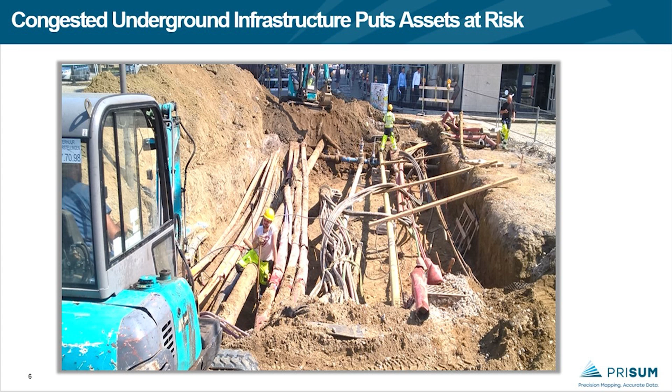It's very important, safety is very important. But other than that, there's going to be service interruption and a lot of project delays, cost overruns. So it's very important for everyone to be proactive to know where the utilities are, so that people building new infrastructure can complete projects on time without surprises.

Most utilities, before they even get into the ground, go through a design phase where as-planned maps are generated by the engineering group of people. But once the contractor hits the ground, either boring or open trenching, he'll run into multiple roadblocks - like probably there's a rock, so he has to steer his HDD away from the rock and keep moving. All these critical modifications or changes made by the contractor need to be captured onto an as-built map.

There's definitely a huge need to have an as-built map generated after the pipe is put into the ground, and these as-built maps are very reliable. If someone is building a new project in the future and referring back to the as-planned map, which was design-based, there's a possibility they may run into problems. So all the GIS systems that utility owners own should be populated with accurate and reliable as-built maps, which will be helpful for future projects.

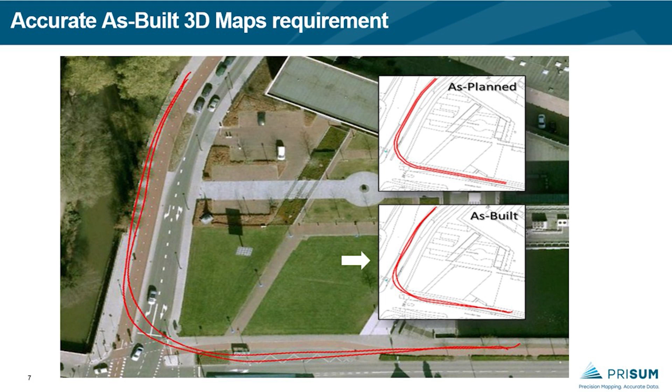You might be surprised, there are traditional systems already existing - a person can walk over, have a sonde in the pipe, tone the pipes, or have a tracer wire to locate those utilities, and that's absolutely right, we can use technologies like above ground tracing to locate underground utilities. But there is a gap. What about if you couldn't locate it with above ground services, like EMI, electromagnetic induction? What if the pipe is going under a river? We cannot do any above ground locating. That's where we add value with this technology.

If the utilities are unlocatable, like for example HDPE or PVC with no tracer wire, we may not be able to locate them. And if it's an abandoned line, no one has a good as-built map showing where those abandoned lines are.

As I said, there's no traceability for the pipes. There are no ball markers or traceable wire, and the utilities are unlocatable, non-metallic pipes.

Those are the scenarios. If it's an HDD bore, HDD bores may vary anywhere from 3 feet down to 30 feet down, or maybe 100 feet down if it's going under water. So all these utilities highlighted on the screen need to be accurately located with other technologies. The traditional methods may not be able to provide reliable data.

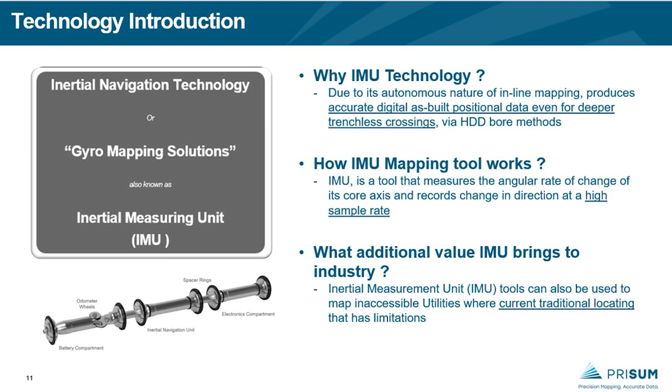What's the value that we are bringing to the industry? Some utilities are inaccessible, where you cannot access from above ground, where there are deeper utilities. The traditional technology will have limitations to locate those utilities. That's where we add value.

I want to explain what exactly happens with this operation. You can see the picture there. The tool is built with odometers, which collect the distance, riding on the ID of the pipe and collecting the distance. And the tool is built with gyroscopes, accelerometers, and inclinometers, which collect the rolling, heading, and pitching information.

So this is the raw data that's collected by the tool when it is run from point A to point B, collecting 100 samples every second. That's where the high definition data comes in for our team, Prisum Technologies, to take the data, process it, and generate a GPS coordinate every 1 foot.

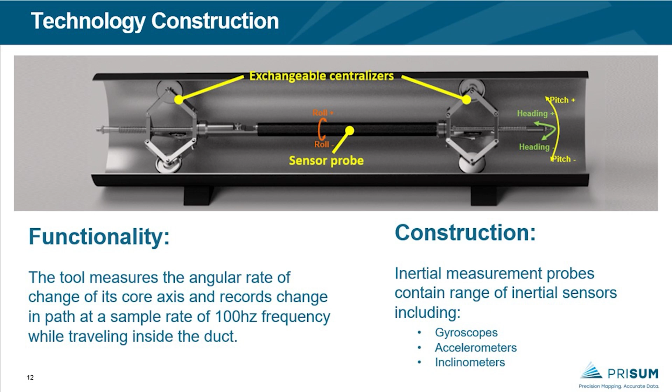It may not be needed for utilities like sewer pipelines or water utilities, but when it comes to the gas industry, they want very high definition data so that they can protect their utilities.

If the two access points are 5,000 feet apart, you don't really need any above ground access. You launch the tool at one point and collect it from the other side, and that's all. You don't need any above ground access, and we can generate accurate XYZ information.

Along with this XYZ information, each utility also sees this data from another perspective. XYZ is always important for the asset management team to establish the GIS information. Whereas if it's a gravity sewer, they need to know the azimuth and pitch information so they can make an assessment or QA/QC verification to ensure the HDD contractor maintained the proper change in grade elevation for gravity flow. Also, when you're trying to put in a telecom line, you need to know the bend radius of the pipe, because there's a possibility they're going to put a huge amount of glass into these pipes.

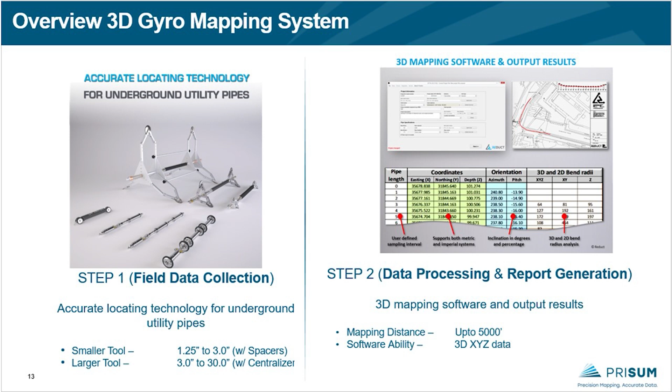And if that pipe has very tight bends, you're going to just break the glass. So the telecom industry and the power industry want to know the 3D and 2D bend radius of these utilities. There are multiple ways people look at this data. It's not only an as-built map, not only XYZ, but there are other benefits that could be utilized for making the right decisions in the field.

So once you run the tool, you connect it to your laptop, give the entrance and exit GPS coordinates in northing, easting, elevation. Once you process the data, you should be able to see the aerial, plan, and profile view, the XY, and also the depth information. And you should also get a 3D model to rotate and see from every angle, which will be the point of interest. So these are the results that will be outputted.

Along with this, we provide a CSV file, because depending on the software system you're using—maybe MicroStation—it's open platform data that comes out from this software, which could be uploaded seamlessly into any GIS system. There will be a CSV format, a KML or KMZ Google Earth file, to make sure the data is aligned to the geography. We also provide AutoCAD script files to generate the as-built maps. So these are all the output files that come out from the tool.

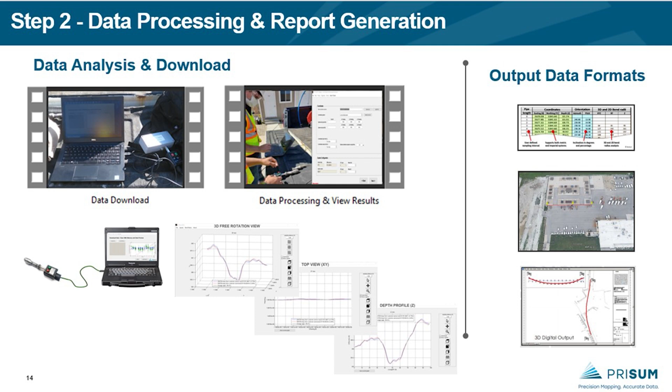And again, this is good—it provides you the data, but the big question is what accuracy this technology can provide. Once we ship the tool out, those are calibrated to a higher frequency. We put it on a robotic machine to make sure the sensors are set to a promised accuracy.

So there are two systems here: one is fiber optic gyros, and the other is a MEMS system. The fiber optic gyros, after calibration testing in the laboratory, are capable of generating an accuracy of 6 inches in XY over 5,000 feet, and also 4 inches in Z over that same 5,000 feet of length. So this is a very sensitive tool, and we need to provide accuracy at that level.

And there are other systems called MEMS systems, which are primarily used for shorter lengths and still produce 6 inches in XY and 4 inches in Z. So these are the calibrated accuracies from the laboratory.

Again, if you ask me whether the data we collected will be 6 inches of accuracy—maybe, maybe not. There's one additional parameter that factors into the equation: the condition of the pipe. If the pipe has water, or dirt, or any other additional parameters, that may affect the level of accuracy of this tool. But we promise that the tools that ship out from our facility are calibrated to the accuracies shown on the screen here.

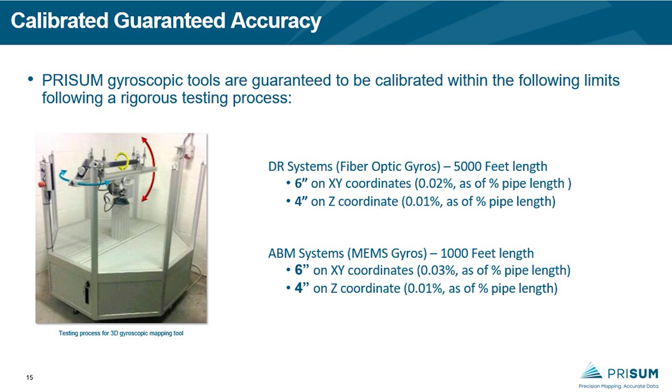Let me talk a little more about the benefits of this tool. Again, as I mentioned earlier, any utility going underground, whether it's sewer, drinking water, power lines, telecommunication, gas, or oil—anything underground—we have the ability to put this tool into the pipe and collect the data. The technology is completely independent of the material of the pipe, whether it's locatable metallic pipes or unlocatable HDPE, PVC, or even concrete pipes; we can still collect the data. So it's completely independent of pipe material.

As I mentioned earlier, there is no above-ground tracing needed, so there's no traffic disruption caused by using this technology. Basically, we need access of 6 by 6 feet on the manhole on one side, and 6 by 6 feet on the other side. The rest of it doesn't even need any access—that could be 1,000 feet apart or 5,000 feet apart. We don't need any above-ground access.

And the depth—as I mentioned, this is an autonomous tool. It's not communicating anything with satellites. All the data collected is stored within the memory on the tool, so there's no tether or communication with a satellite. So whether the utilities are 6 feet below or 100 feet below, the data produced by this technology is highly reliable. And the reason we say highly reliable is that if someone is walking above ground, he's going to collect a point every 50 feet, or 100 feet, or even 25 feet, and manually connect those points.

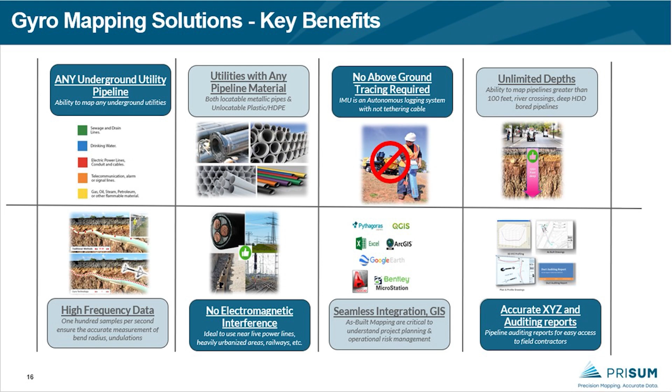One of the things I'll probably discuss in the next few slides is that there were some surprises that we ran into when we were mapping one of the utilities. So all those details, it's not going to be in the contractor's mind - it will be captured into this documentation. If someone is opening this document 5 years from now, he will have a full understanding of how this utility is constructed and what the condition of the pipe is.

So that concludes my technical presentation. I'll be spending more time walking through the results of the project, the bridge replacement project, and the utility investigation using the gyro mapping tool.

The first one is the 16-inch HDPE artesian water utility from the causeway, from one island to the other island. You can see the west side - this is where the tool is launched. And the other side is where the tool is retrieved.

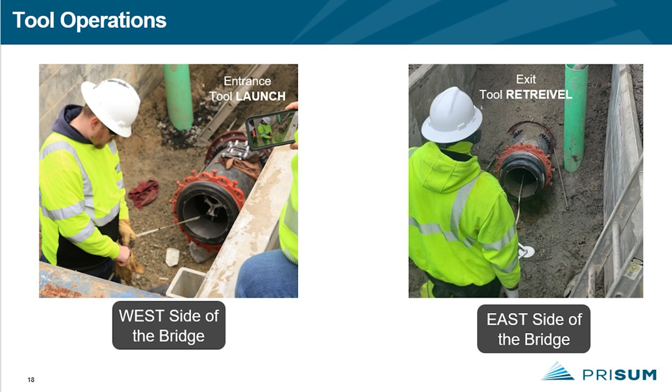And again there are some pictures. So the one thing on this project is it's a pressurized water main, and we cannot launch the tool into a pressurized water main.

Though the tool is designed to operate in both dry and wet conditions, in order for us to maintain the high level of accuracy, it's preferred to de-water the water main and then launch the tool. You can see the picture on the top left - digging down to the utility, daylighting the water utility - and then the other group of people came behind them and used their system to de-water the pipe.

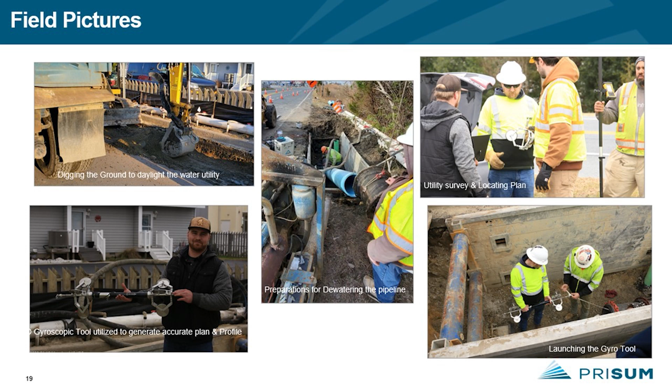Once it is dewatered, the utility survey team collects the GPS coordinates on either side. You can see the bottom leftmost picture, the gyroscopic mapping tool, which has been used to run from one end to the other end. You can see the picture on the right where they were launching the tool with the mule tape on either side of the pipe. So there was a lot of coordination that happened through this project.

And once we run the tool, this is what the results are. Again, this is all the data that's been collected - it's GIS data. It's northing, easting, and elevation, and also we can convert the data into lat-long information.

We never tie this data into a topography. Every time we give the elevation, it's mean sea level, so even if someone comes 5 years from now, the data is still accurate. If you are trying to give the depth for the utility today with respect to the top surface, that's a temporary topography - someone may come grade the surface or put new pavement, and that's always a temporary reference, and we don't want to do this.

We always want to tie the data to a global reference, and this is all the results for the first utility, the 16-inch artesian pipeline. The picture on the left is northing and easting, which is XY information, and the information on the right is the elevation versus the easting.

Again, this is with a scaling of 1:1. I will be showing more detailed depth information - so this is not 1:1. This is basically 60 feet on the y-axis and 1,500 feet on the x-axis, so this is more like a zoomed in version so that we can get an understanding of how exactly this utility is bored under the water bed.

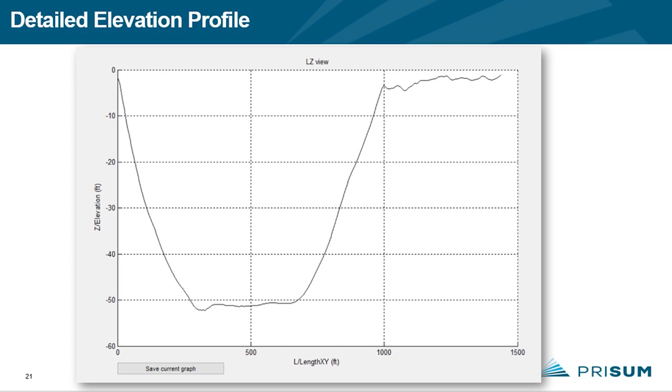So you can see the overall change in elevation is close to 53 to 55 feet, from one end to the other. And this is the 3D model where you can rotate it and try to see it from multiple angles. So this is viewed through the software. And again, do you really need 3D?

Because in the digitalization of the utilities, it's not only XY that's critical, the depth information is very important too. Having this 3D model built into the system will enable us to utilize powerful tools like augmented reality. But again, those tools are only powerful when you have highly accurate data. So 3D modeling will become more of a requirement in the near future, and it's better to be proactive and start working towards that goal.

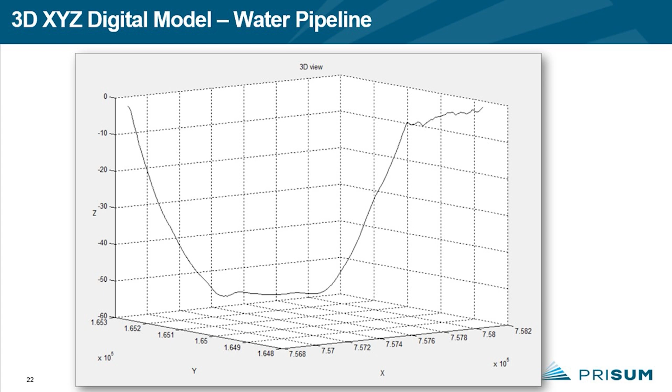This is from the aerial view. Again, you can see there are two pins, one on the west and one on the east. Survey grade GNSS tools are utilized by Inframap to collect the GPS coordinates on either side, using sub-centimeter accuracy GNSS tools. This is very critical for the process, because if this data is off by 5 feet, then all the GPS coordinates generated between these two boundary conditions will be off by 5 feet. So it's more important for us to get this highly accurate GPS coordinate.

And again, it's not difficult. There's been a lot of democratization in the GNSS world. There are very powerful tools which can generate highly accurate GPS coordinates. So once the GPS coordinates are collected, we put the tool in the pipe and process all the data with this known GPS coordinate. Once we process the data, that's where you see the XYZ, the plan and profile of the pipe. The red line is the result of the 3D gyro mapping system.

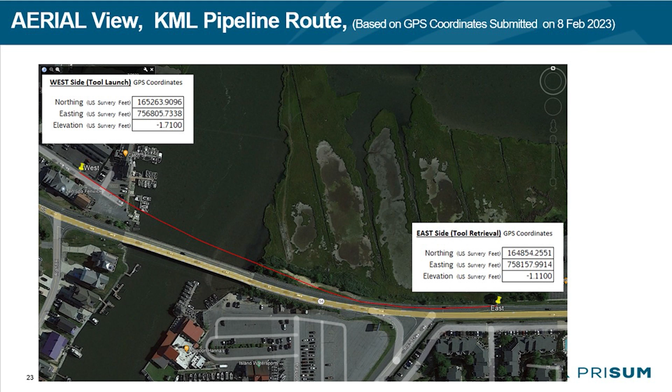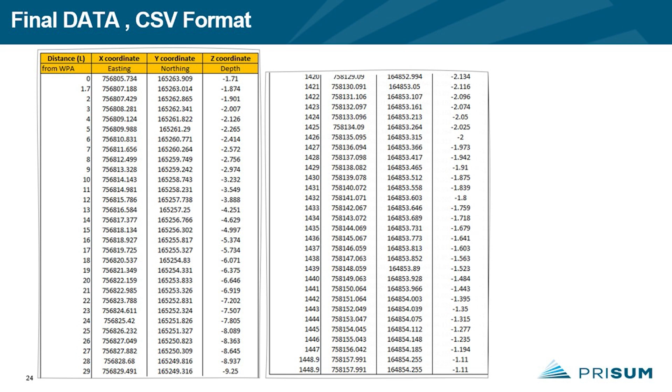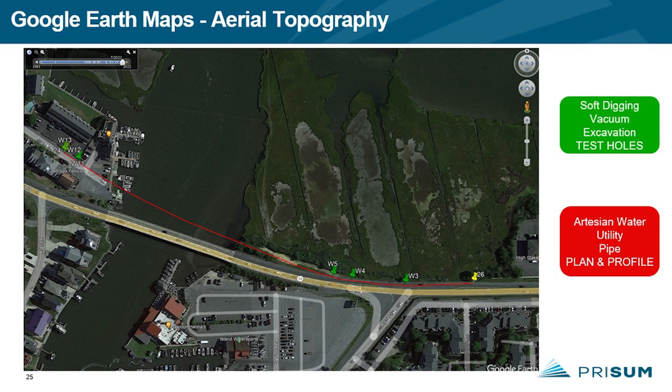So that concludes the first part of the presentation, which is the artesian utilities. And now we get into the other side, which is the 8-inch force main sanitary sewer pipeline.

So here, again, I'll let Mark pitch some of the lessons we've learned. It's an 8-inch pipe, and we were using a very similar tool to the one used on the water utility. We always make sure we don't use the same tool on multiple utilities - we always keep the sewer mapping tools separate from the water main mapping tools. So we have a second DR4, which we planned to use on this sewer pipeline.

And after running about 510 feet, the tool was not able to move any further. We didn't really have any understanding of what was happening. The tool has a set amount of expansion when it's in the pipe, because it's spring-loaded, and the odometers will be touching the ID of the pipe.

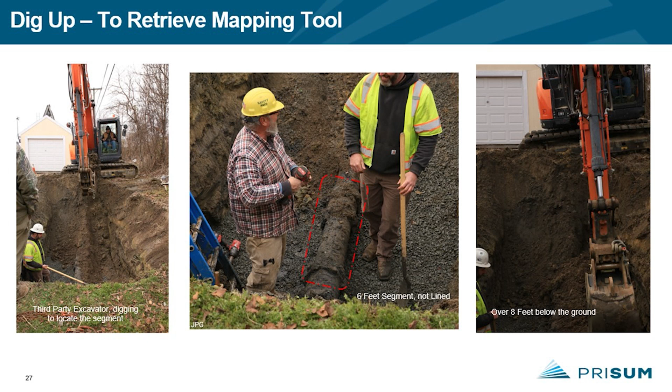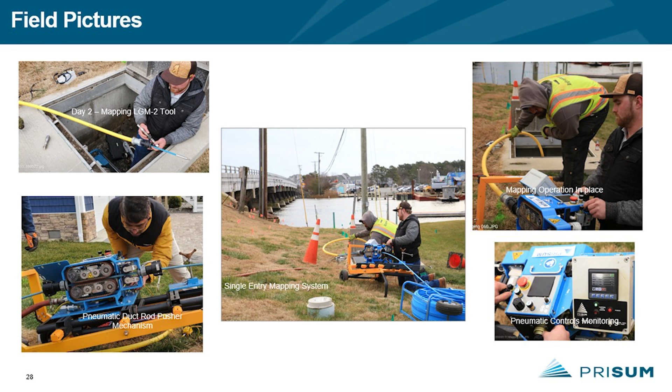So we take these two data into the software and process the data. We were using an 800 foot push rod system to push it through the pneumatic pusher and get it to the furthest point. Once it gets to the furthest point, we pull it back. Basically, the system has directional motors which push the tool further from the starting point, then reverse the motors and pull it back to the starting point. Once we pull the tool to the starting point, we connect it to the laptop and process all the data.

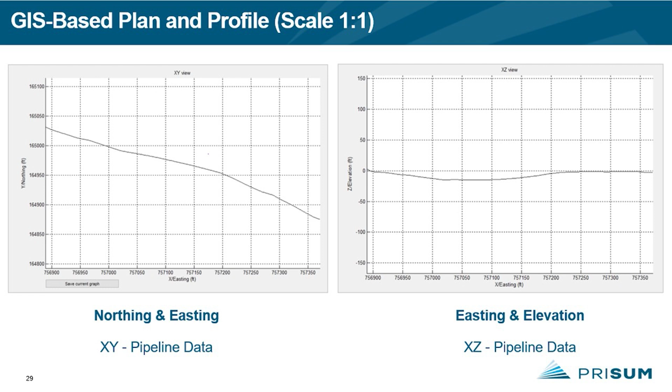Let's see how the elevation profile looks from a depth point of view. You can see it's almost going close to 16 feet below, I'll say 16 to 18 feet below. Probably we have more detailed information from our CSV file.

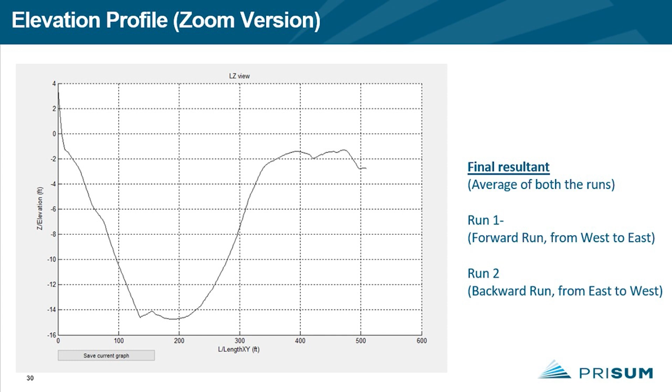So there were two runs that were done. The first run was going in the forward direction from west to east, and the second run is considered a backward run, coming from east to west. So the results shown on the screen are the average of both runs, which gives us a good understanding.

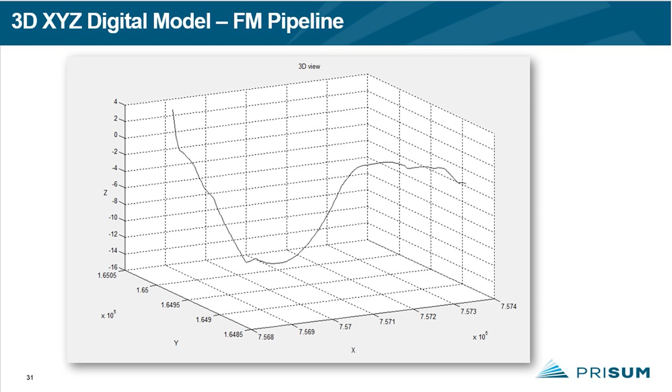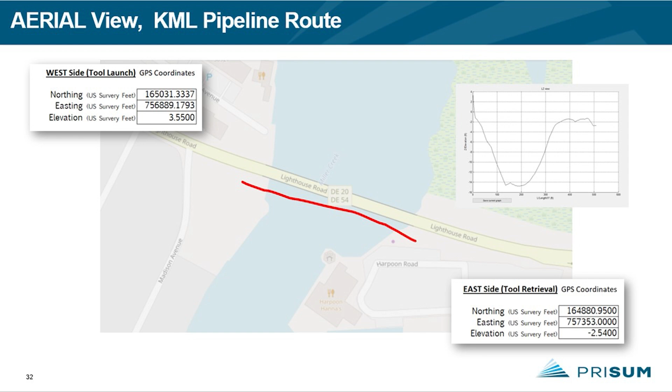But from the depth perspective, the data is reviewed with some of the information we have from Sussex County to build more intelligence and more confidence. So you can see this is the XY information. The utility is bowing more towards the bridge. You can see there was bowing happening towards the bridge, and this is the depth information. Again, as I said, we provide them the CSV file to put into their system and get better understanding.

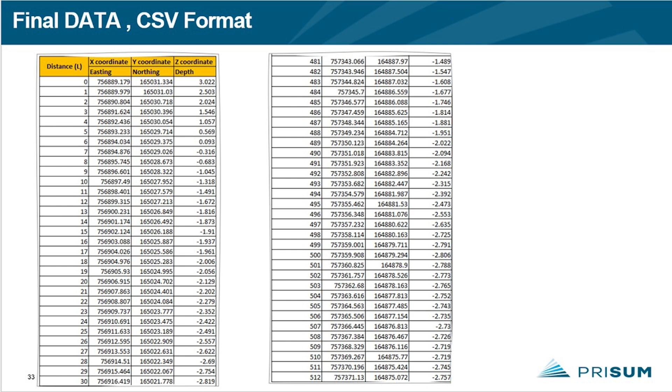So again, I apologize. I was planning to be there in person to present this information, but because of a family emergency I had to travel internationally to meet my family, so I couldn't be there in person to present this. But the plan was to present this data in collaboration with Inframap. Inframap and Prisum Technologies have put these details together.

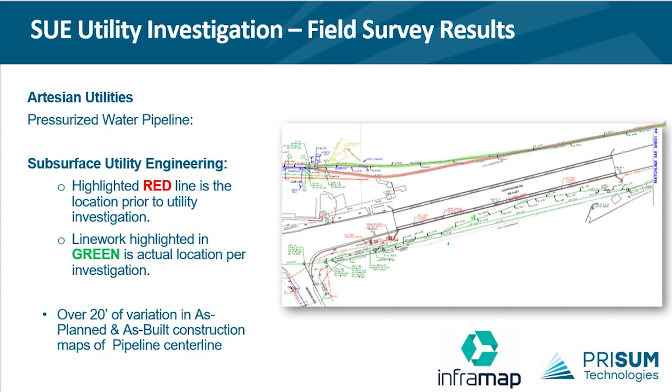And again, we'll say this data provided by the gyro tool is accurate because the tool is riding inside the pipe. So all the data provided is based on what the tool collected when it is inside the pipe. Let's see how it looks on the Sussex County side.

The red line is the line that's been informed how this utility is installed. If this utility was installed tens of years before, basically they generate the map connecting the two manholes with a straight line. You see the red line is just connecting the manhole on one end of the island to the other end—it's just connected as a straight line.

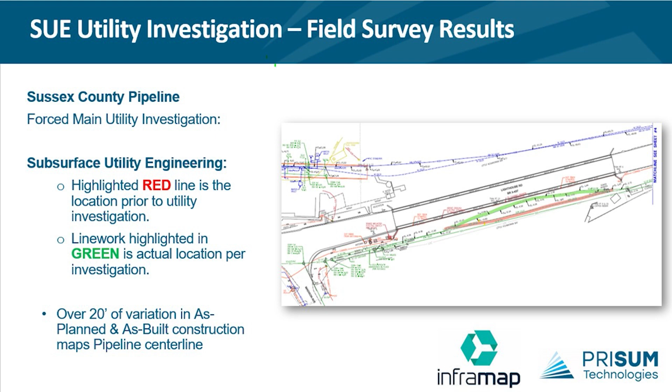But when we ran our tool, this is the true representation of that water utility. There is a significant offset at the bottom of the water bed. You can see that the XY is off. The green represents the gyro mapping system.

I'm getting close to the end of my presentation here. Prisum Technologies is providing this as a service to run these gyro mapping tools. We will be able to work with your preferred vendors—we give the tool to them, and any person who can pull a rope through a pipe can be able to pull this tool through. There is no extensive training needed, but there are some best practices you need to follow when running the tool.

Try to make sure that you are maintaining a consistent speed. We have electric operated and battery operated winches which will make sure the speed is consistent. So basically, there are very basic best practices that need to be followed, and any contractor can pull this tool through and be successful getting step one, which is the data collection. Step two is the data processing.

All the data collected by the tool will be uploaded to a cloud where it's received by the data analysts, who will process it and generate an as-built map within a matter of hours. Even before you close the field, we want to make sure the data collected is reliable so that you can go ahead and close. Within a matter of a few minutes, we should be able to tell you whether the data collected is reliable, so field contractors can go ahead and close the ground.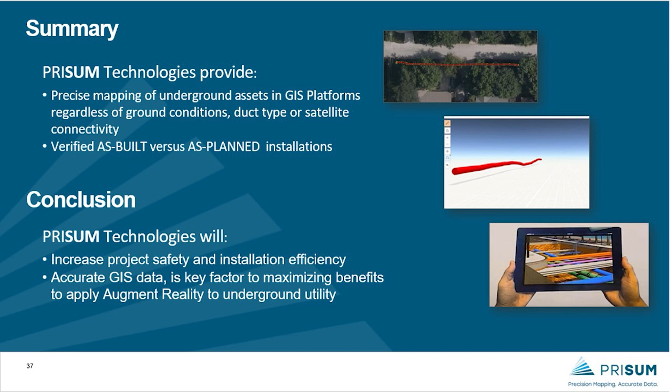The industry is moving towards digitalization—all the data collected will be uploaded into 3D modeling using the ArcGIS ESRI systems, and also augmented reality. Augmented reality is a very powerful tool, and those are expensive, powerful tools. In order to maximize them, we need an accurate as-built map. If you're trying to put an as-planned map into these powerful tools, we're just defeating the purpose of that technology.

So I think this is my concluding slide before I pass it on to Ken, Kerr and Sean. Thank you very much for giving us an opportunity to utilize these tools and help you on reducing the damages and hits in the field. So back to you, Eric.

I have the next slides for InfraMap to go over some of their observations and lessons learned, and also lessons learned from Sussex County and the Artesian water utilities. There is a concluding slide from the DelDOT team on how this data is being utilized for the planning stage, and how it helped build confidence before getting into the field for the bridge replacement project. Thank you, Eric. I appreciate your help, and if there are any questions, I will be available, or one of our representatives will be there to answer the questions. Thank you very much.